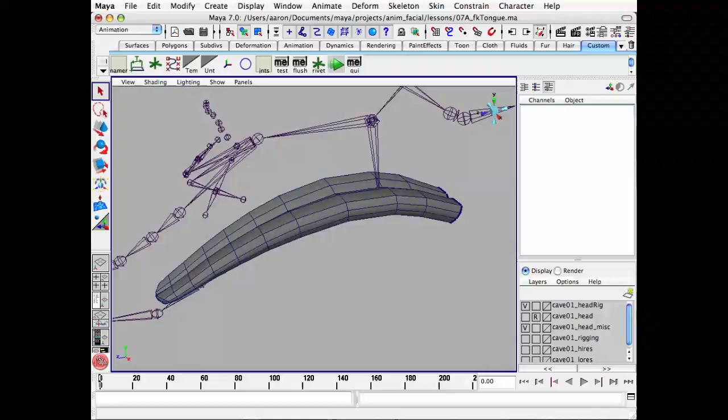So in this lesson, we're going to build a fairly simple forward kinematic tongue for this character. But although it's straightforward and fully FK, you'll see that we can add quite a bit of control to this tongue rig just using simple joints in an FK structure.

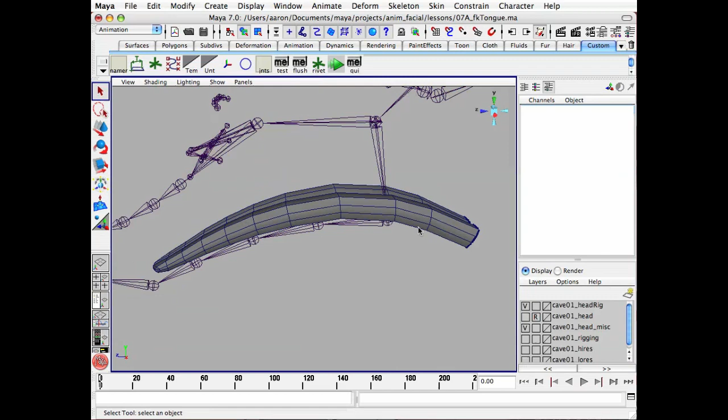So what we're going to do is we're going to start by drawing a series of joints down the length and then joints out to the side. So let's switch to a side view here. Just switch to select the skeleton joint tool, and starting at the base toward the center, I'll draw the joint nodes, basically drawing a joint on each of the edge loops.

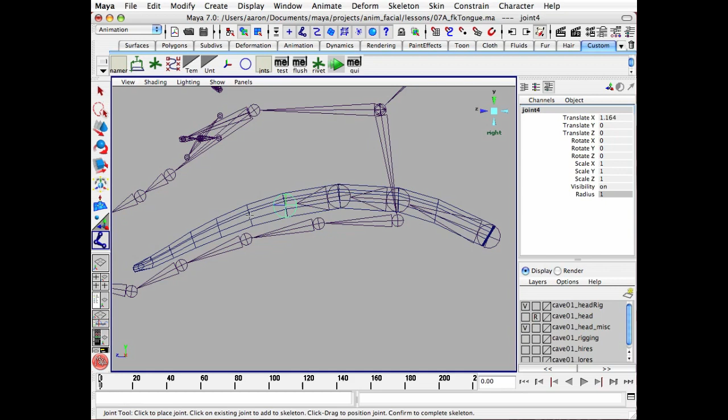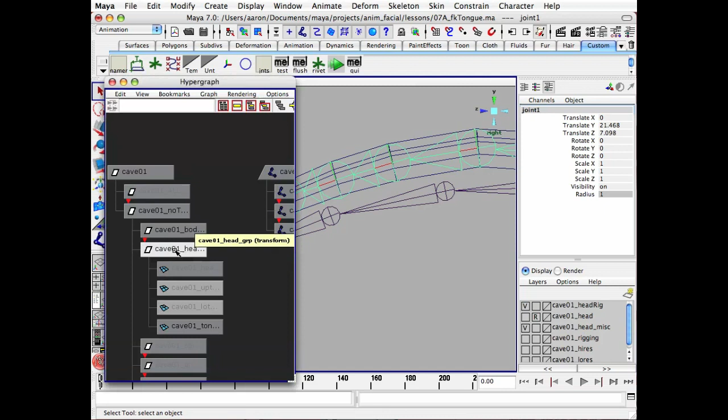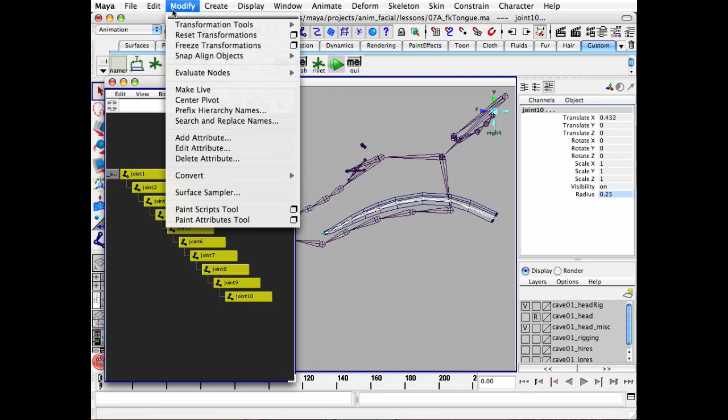As usual, you could use a spline as a visual guide for this. Okay, the one at the end. Open up our hypergraph here. So here are all of our joints. Let me select them and change their radius, make them a little smaller. Okay. So now with these selected, I'm going to just quickly rename them. Okay. Search for joint and rename.

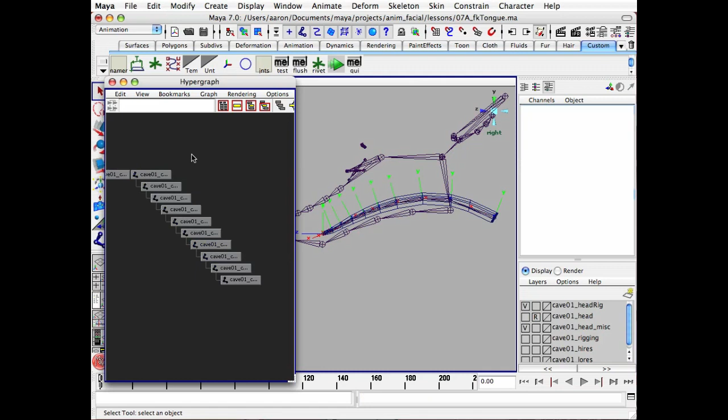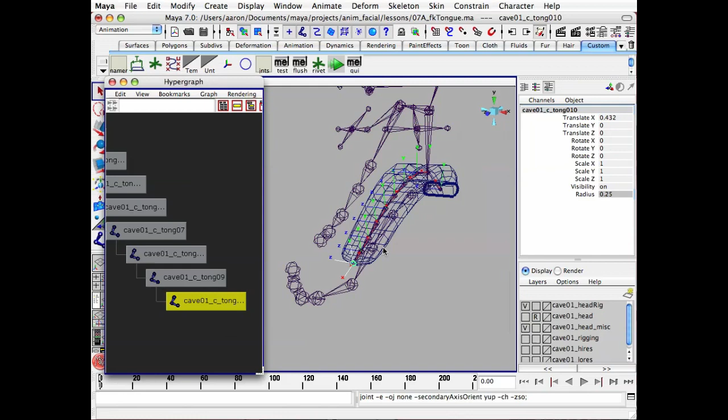Okay, now I'm going to display all their local rotation axes. Okay, first thing I'm going to do is reorient this last joint so that it matches the orientation of its parent. Then I'm going to rotate each of them 90 degrees so that the y-axis is pointing out to the side. So with the last joint selected, I'm going to select Skeleton, Orient Joint Tool, make sure that it's set to none, which is what we're using throughout these demos, tutorials. Okay, so now it's matching the orientation of its parent.

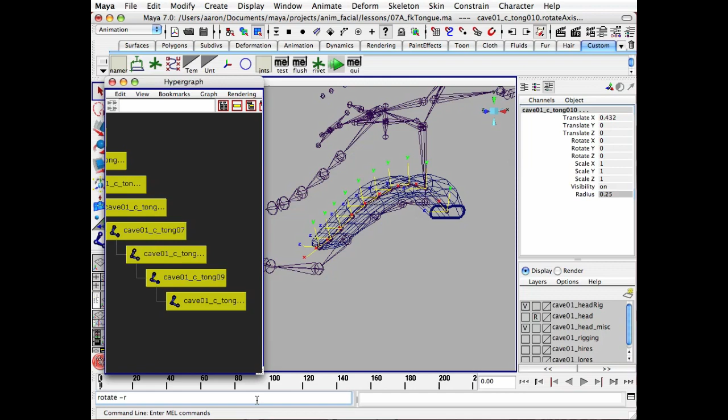Now I'm going to switch to component mode and click on the question mark icon, which activates the local rotation axis selection. I'm just going to select each of these local rotation axes and rotate them 90 degrees by typing rotate -r for relative 90, 0, 0. It's rotating 90 degrees on X. Okay, switch back to object mode. I can hide these local rotation axes.

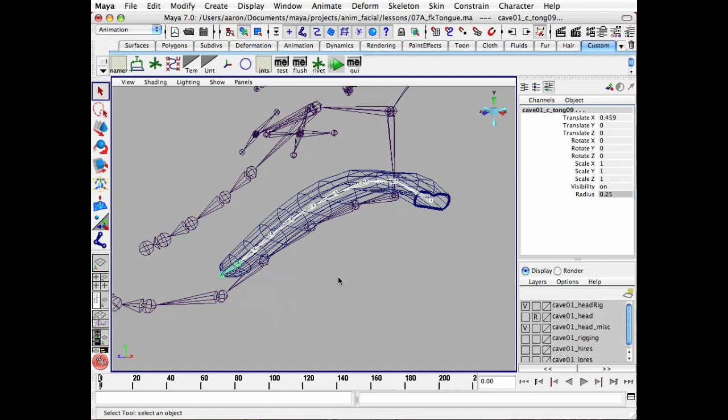So at this point, we have a basic FK tongue rig. Now we can do all the curling on all the axes. We're going to add a little more control here. I'm going to add joints which will emanate out to the side of the tongue. And that way that will give us control over folding this tongue upwards, what we call the tongue taco. Once again, that's pretty straightforward.

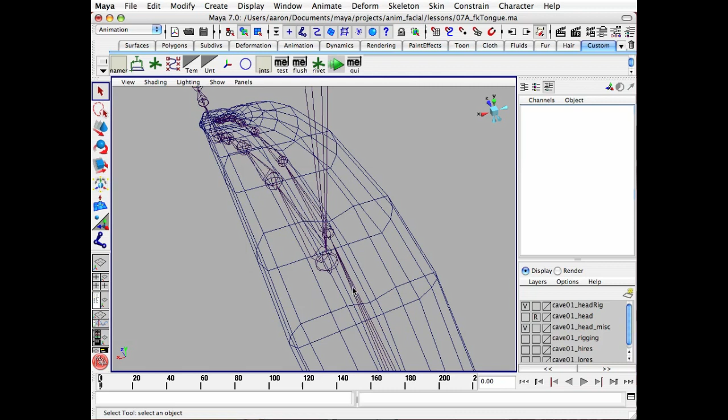I'm going to switch to a top view here. Hide the standard rig. Okay. So once again, I'm going to activate the joint tool. And holding down V, which activates the point snap, I'm going to snap onto the first joint. And then holding down Shift, just drag it out to the side so that it's creating a straight line.

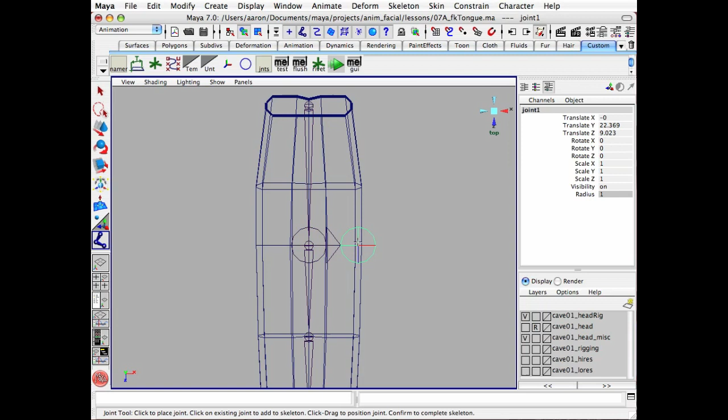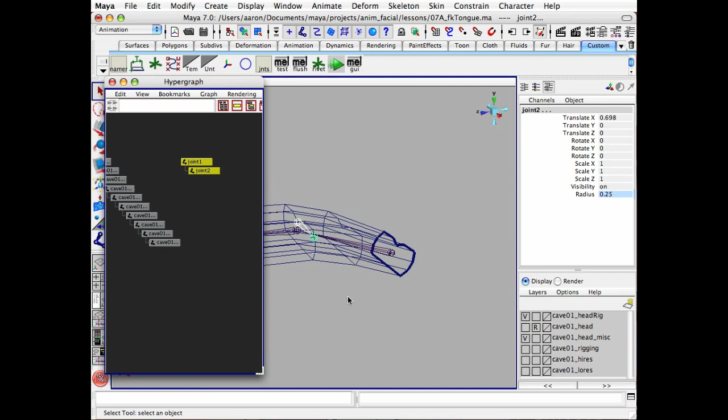Let me change my joint tool here so that I get a smaller radius. Okay. Okay, so now with this selected, just change this radius. Snap that down there. Quickly rename this. Modify, Search and Replace Names. We're going to call this L tong.

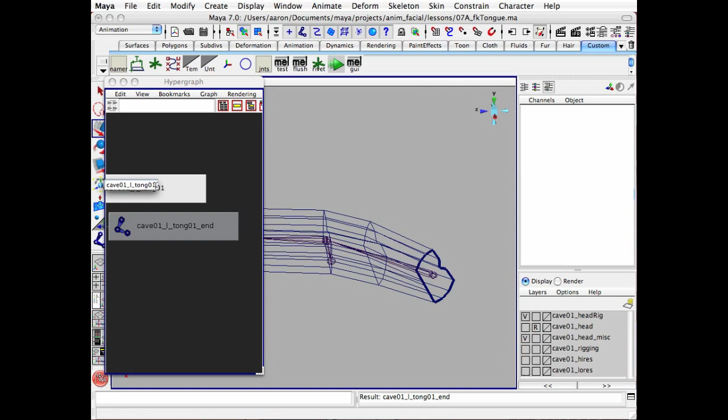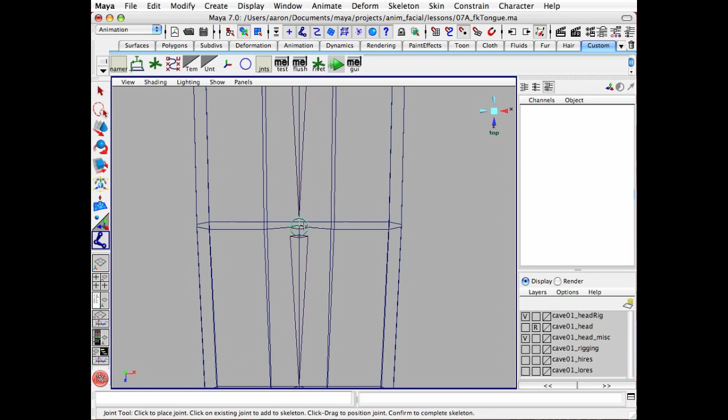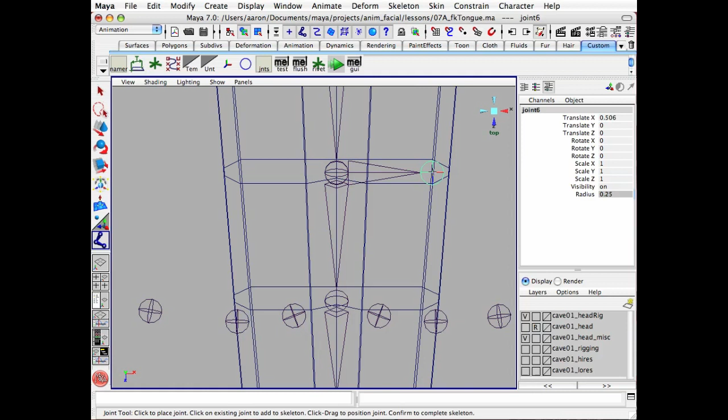And then repeat that all the way down the length of this tongue. Activating the joint tool, holding down V, snap the first one, and then Shift to just drag it out to the side. Okay, and one more.

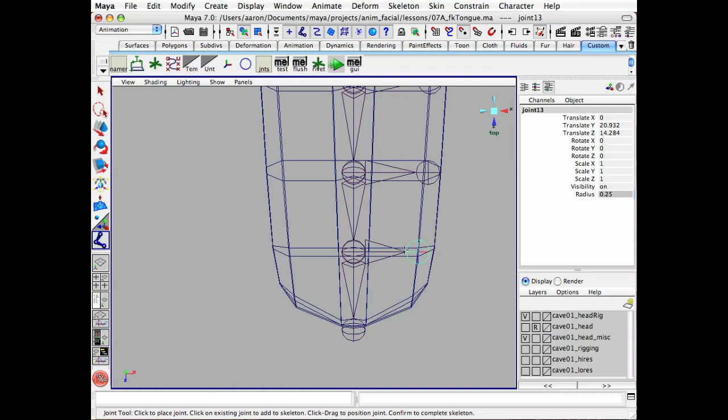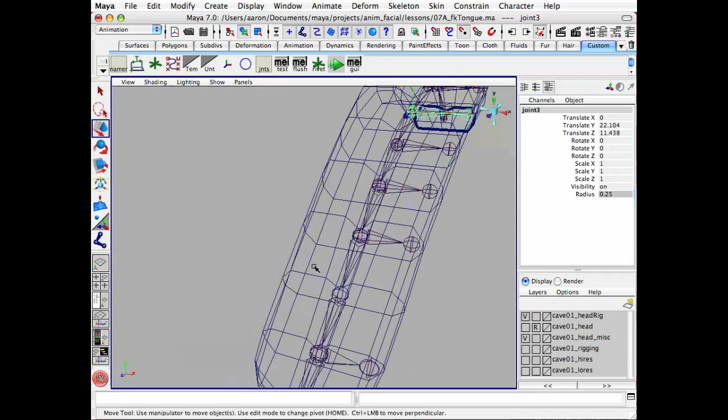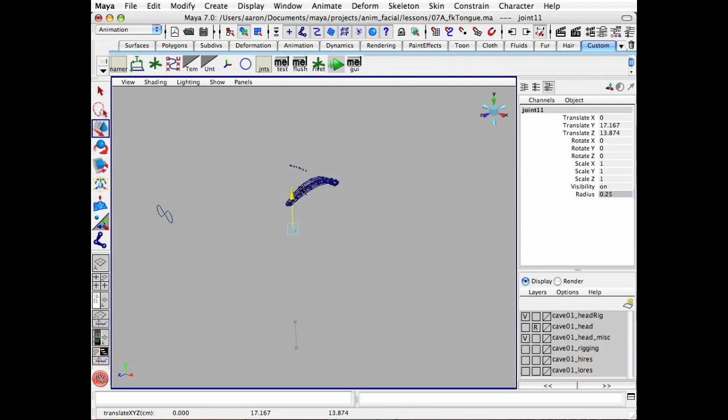Okay, so let's switch to a perspective view. We'll probably have to go in and point snap some of these joint nodes so that they reside directly on top of that center joint. Oh, we missed one here. Did we? Let's see here. Yep. Let's move this one up. Point snap it into place. Okay, there we go.

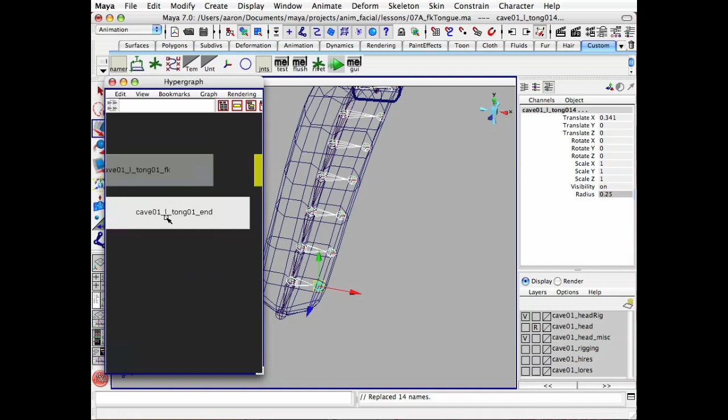So I'm going to quickly rename each of these. Going back to Modify, Search and Replace Names. Just quickly rename them. This will be tongue 2 FK. And so on. And the reason naming is important in this case is we're going to mirror these over to the opposite side, so having the underscore L underscore designation will help us mirror it from the left side to the right.

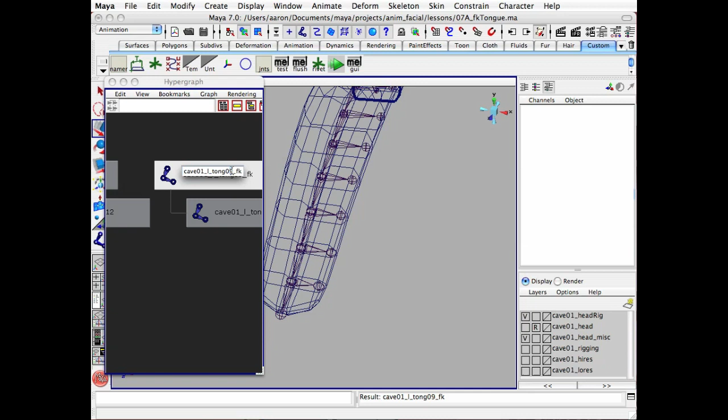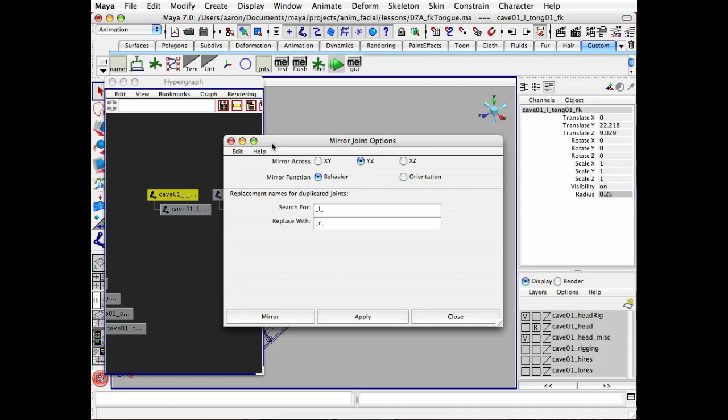Okay, so now with that done, go in and mirror each of these. So select each joint, the root of each of the left tongue joints, and then select Skeleton, Mirror Joint tool, open the option box. We're going to make sure that we're searching for _L_ and replacing it with _R_. We're going to mirror the behavior and then mirror across the YZ axis, which splits down the center of the character.

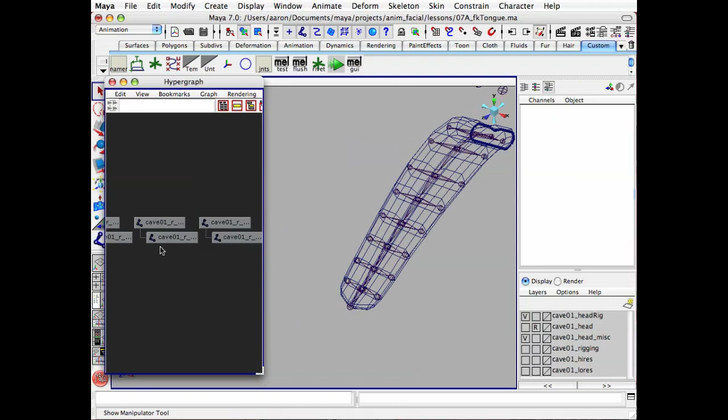Okay, so using the G key, repeat that for all the subsequent joints. Okay, so now we have our left and right joints. Now what I'm going to do is I'm going to simply parent these joints, the left and right joint, to the nearest joint node here. Let's hide the polygons for a second.

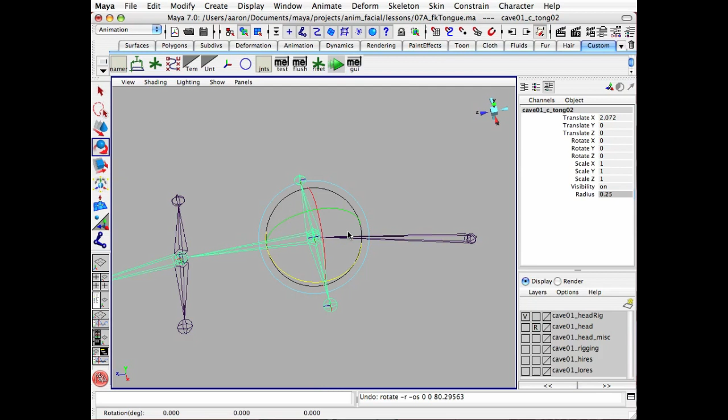So now when I rotate this, you can see that when we reach a 90-degree angle, the left and right joints fold in on themselves, and that would be pretty bad for the geometry here. What we're going to do is we're going to create what I call an averaging joint. Let's unparent this.

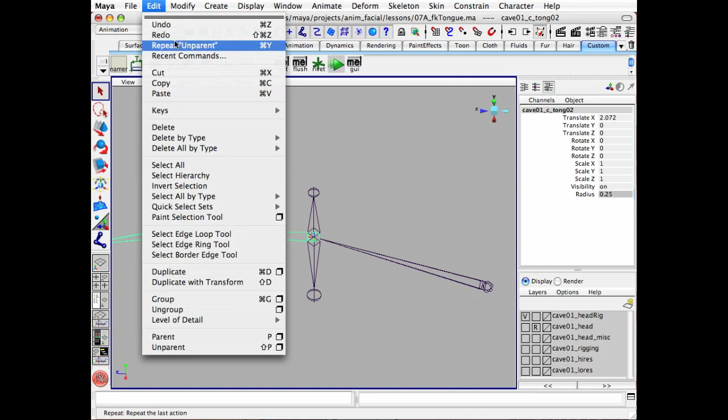What we're going to do is we're going to duplicate the center tongue joint, select it, Edit, Duplicate. Okay, make sure we have default settings here. So delete all the joints underneath this duplicate and call it C tongue 02 AVG for average.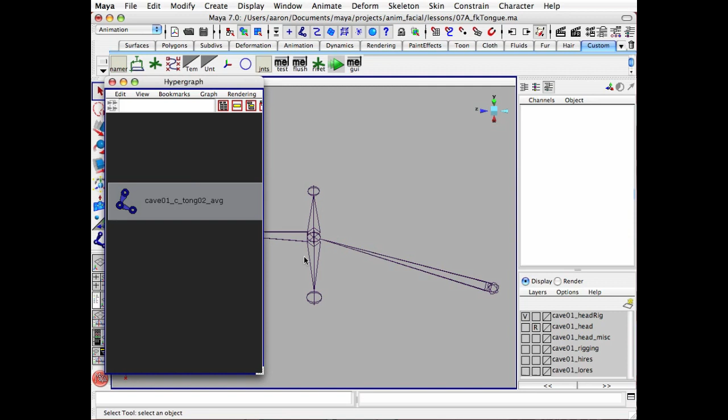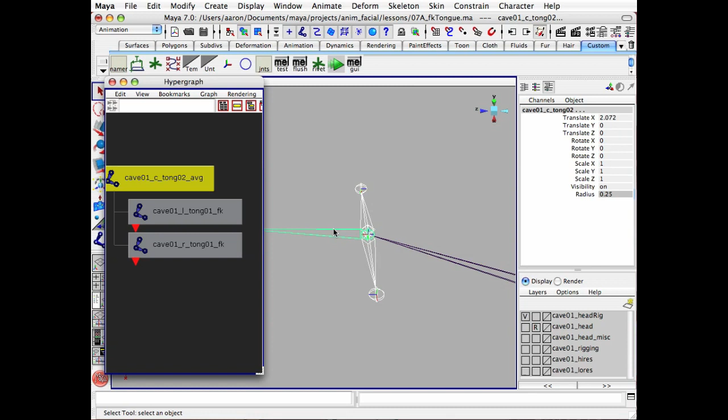I'm going to parent the left and right tongue joints to the new parent, the averaging joint. And then parent this averaging joint to its parent, which was the original from which it was duplicated. So if we look at the hierarchy here, we have the original tongue joint. We have a duplicate of that joint, so it has the same local rotation axes and position. We'll call that tongue average. And then the left and right joints are children of the tongue average joint.

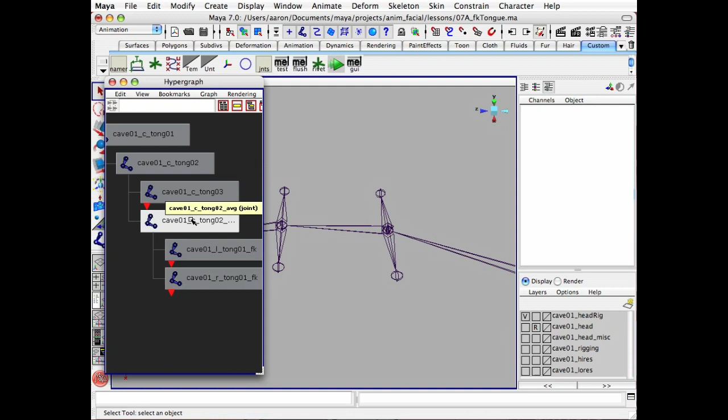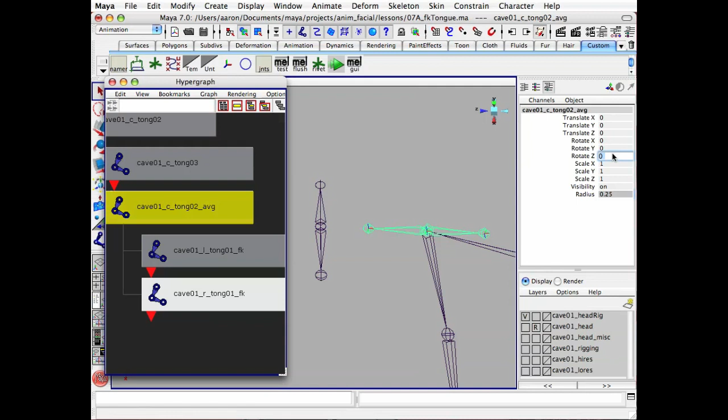What we're going to do is, using a multiply divide utility node, we're going to negate half of the rotations on all the axes of the tongue joint and apply that negative 0.5 rotation to the tongue average joint. So for instance, this rotates 90 degrees. We'll negate 50% of that. So in essence, this will be negative 45. So we'll average those rotations and help dampen the effect of this 90-degree rotation here. Help significantly with the deformations.

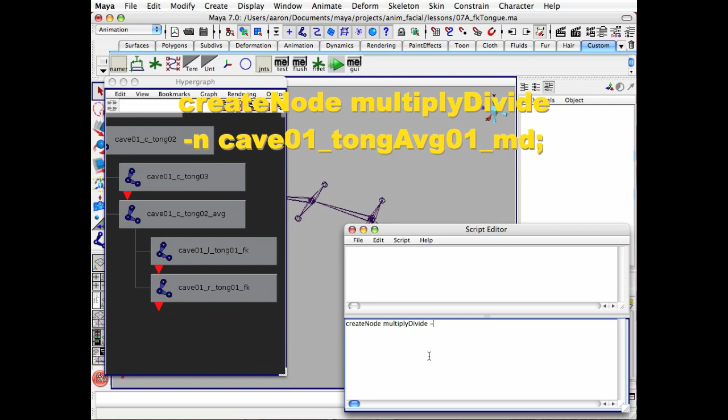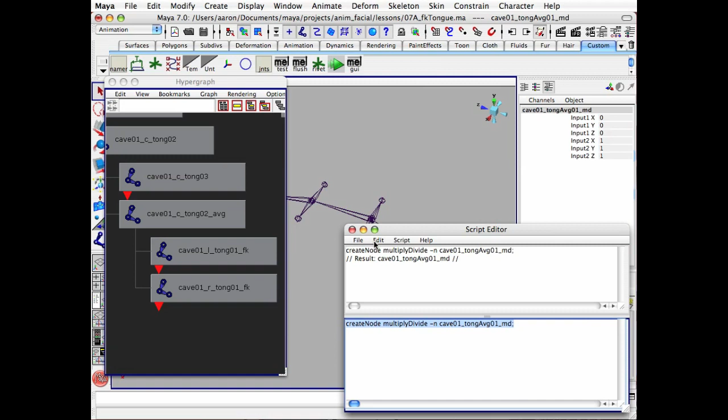Okay, so to do that, let's open up our hypergraph, our script editor, clear it out. We're going to first create a multiply divide node. So in the script editor, createNode multiplyDivide -n so that we can give it a name. We're going to call this cave01 tongAvg01, so tongue average 01 MD, multiply divide node. Select that, hit enter. So here's our multiply divide node.

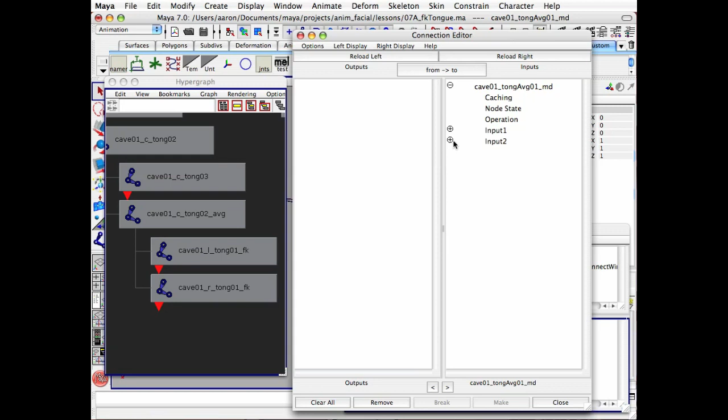With it selected, let's open the attribute editor. Make sure it's set on multiply, which is the default. And now let's open the connection editor. Window, General Editors, Connection Editor, and load our multiply divide node into the inputs. Okay, expand these windows here.

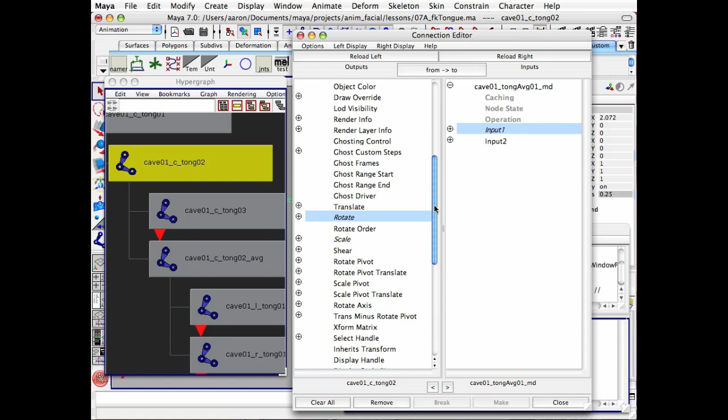What we're going to do is we're going to connect the rotate channels of the original tongue 2 joint. We're going to connect all of the rotation channels into the input 1 channels of the multiply divide node. So the rotates are connected into the input 1 of the multiply divide node.

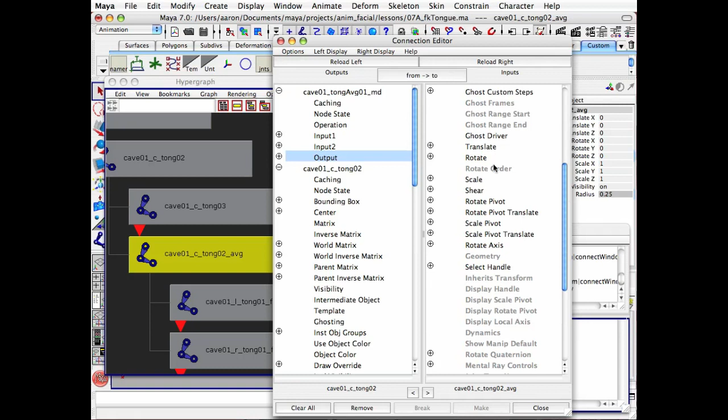I'm going to select the multiply divide node, load that into the outputs of the connection editor, select the tongue 2 average joint, load that into the inputs, and then connect the output of the multiply divide node into the rotate of the tongue 2 average joint.

I'm going to go back and copy and paste these results here. Reason being that if we were to duplicate this process for all the other left and right joints, it'll be fairly easy to do by just changing the numbering of these connection statements. Let's clear out the history of the script editor.

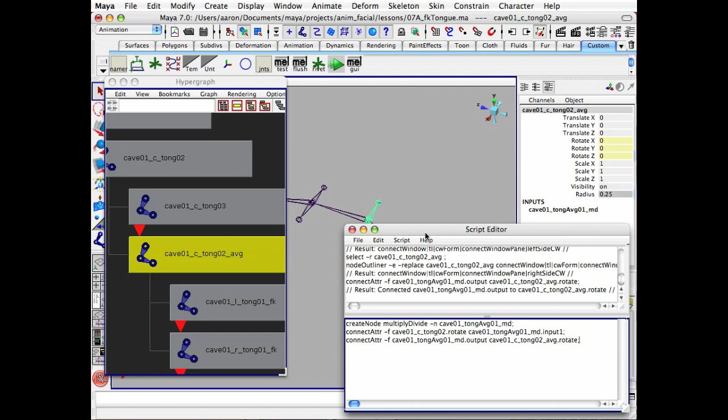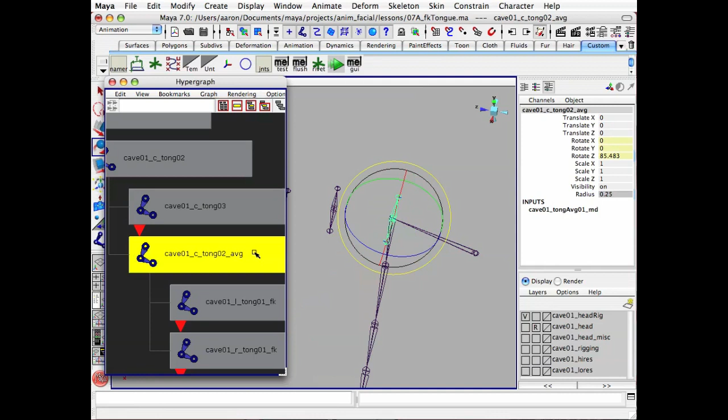So now with the multiply divide node selected, well, first let's rotate this, the original tongue 2 joint. You can see we're actually getting double the rotations on the averaging joint. Let's go to 90 degrees here. The reason being is we're connecting the rotations of the tongue 2 joint into the rotations of the tongue average joint through the multiply divide node.

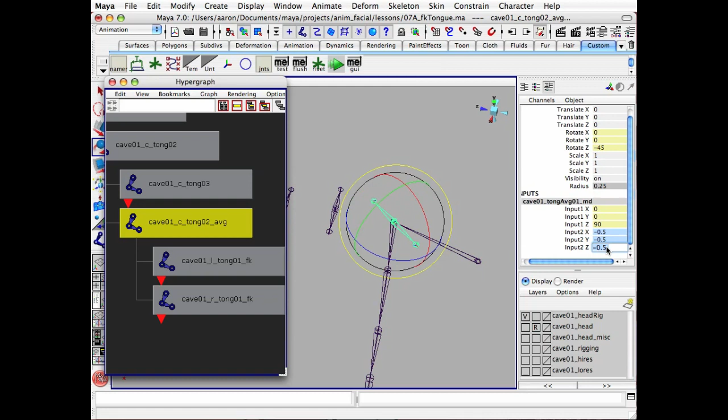So we have a 90-degree rotation in Z. We're feeding that 90-degree rotation again into this tongue average joint, but it's also inheriting the 90-degree rotation from its parent. So it's actually getting 180 degrees rotation. So what we need to do with the multiply divide node is set all of the input 2 channels to negative 0.5. And that's how we will average the rotations out. Let's select those setAttr statements in the script editor and copy and paste those.

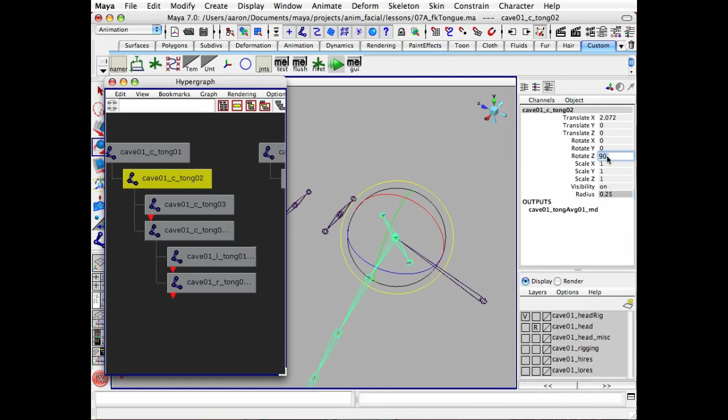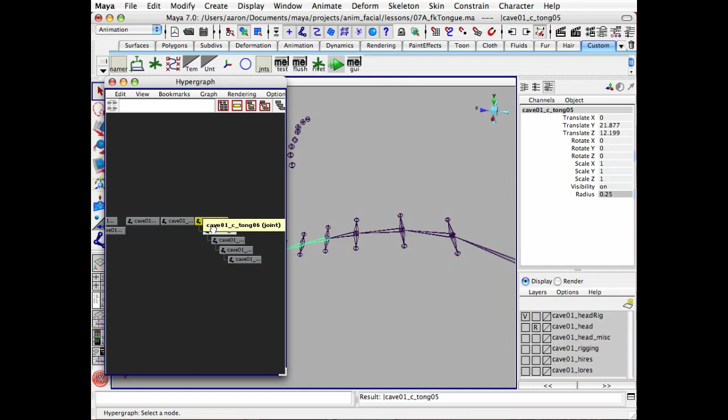Okay. So now to duplicate this process, just going to select the tongue 3 joint, Control D to duplicate. Unparent each of these, and these are going to become our averaging joints all the way down this tongue. So I'll just rename a few of them.

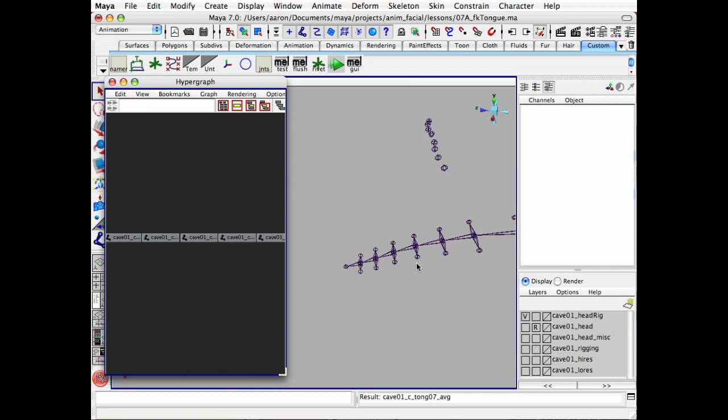Of course, I ended up renaming all of them. Okay, so we have our tongue average joints, and I'm going to parent the corresponding left and right joints to the proper average joint. Just selecting the left and right joint, shift selecting the appropriate tongue average joint, hitting P for parent.

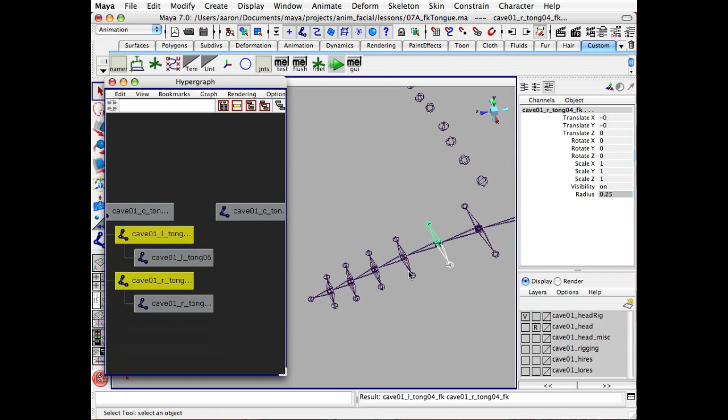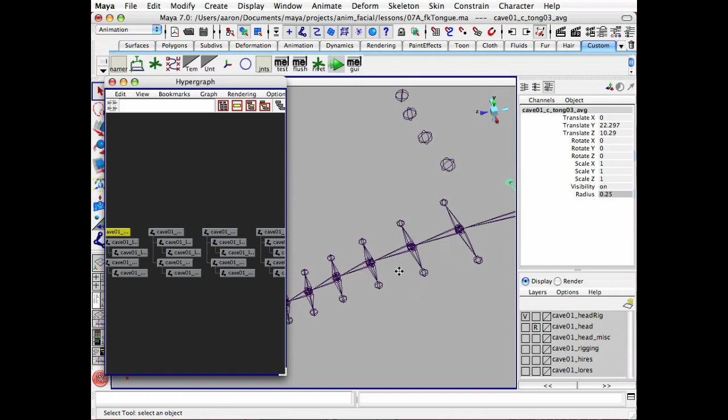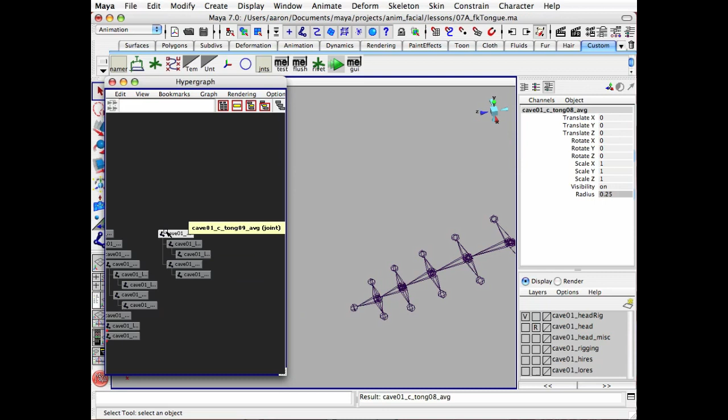Okay, now I'm going to parent the tongue average joints to the appropriate parent. Although I'm doing this all manually, something like this you can see is quite repetitive and could be fairly easily scripted, especially since you likely have matching naming. Like for instance, if you match the numbering of your tongue average joint, tongue 9 average, with the joint that it's the duplicate and parent of, scripting this should be fairly simple.

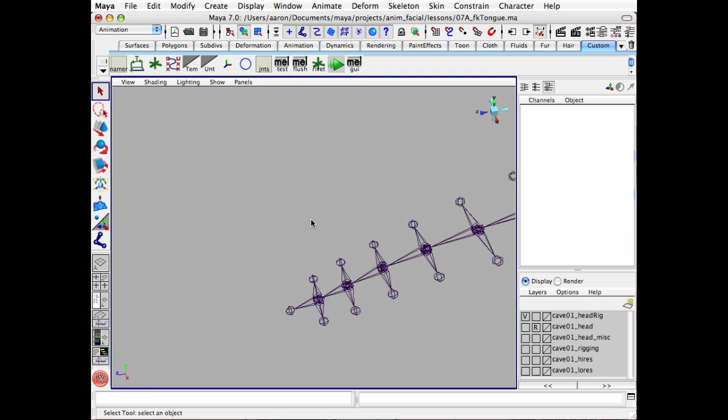So next what we're going to do is simply change the numbering in the input section of the script editor so that we will apply this averaging down the length of the tongue. So here, rather than tongue average 0, 1 multiply divide, we'll change that to 2. So all instances of that tongue average 0, 1 will change to 0, 2. Then we'll increment the joint. So this is tongue 0, 3.

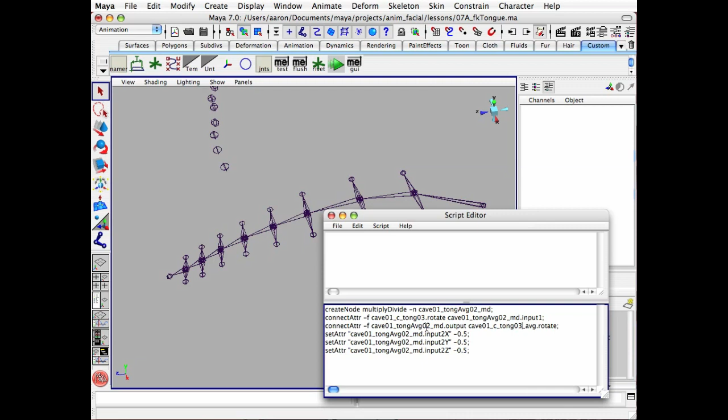Okay, select this, hit enter. So now we should have 2 averaging joints. Okay, there they go right there. Looking fine. We'll just quickly go all the way down the length until we finished with 9. Once again, you can see how something like this can and should be MEL scripted, since it's highly repetitive and through naming and numbering, you should be able to automate something like this fairly easily.

But you'll see once this is done, although this is a fairly simple and straightforward tongue rig, it's actually quite capable. It can do just about anything you'll need to do with a tongue. You'll be able to rotate it on all the axes. You'll be able to scale it. I wouldn't recommend translating it. You'll throw off your local rotation axes. And with the side joints, you'll be able to fold the tongue up or down. So quite a bit of flexibility.

Okay, thanks for bearing with me as I change these numbers out. Just a couple more to go here.

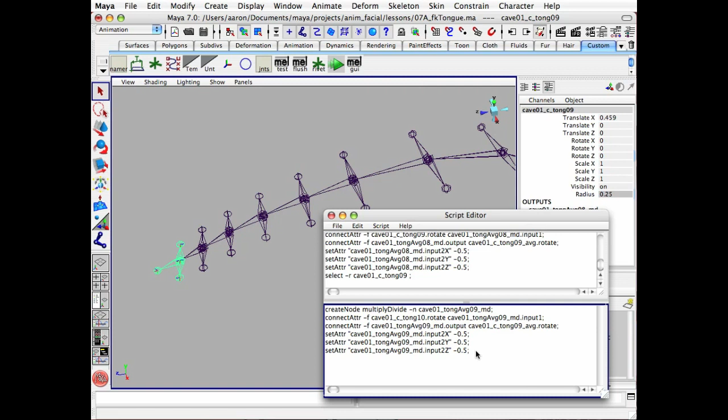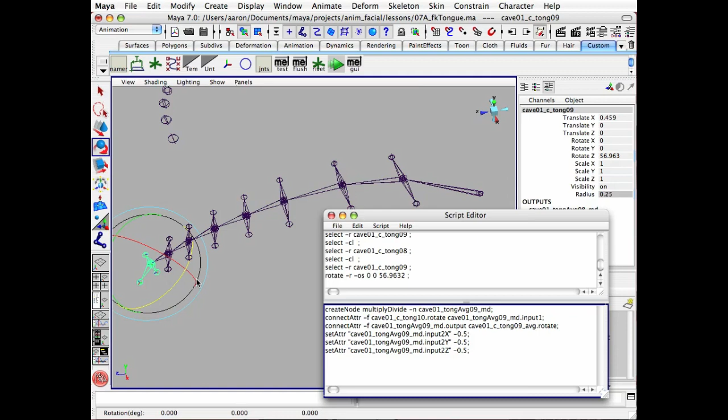Yeah, this is the type of tongue rig I personally like to use, if this FK style tongue is appropriate, which often it is. But once again, it's very simple, I think, and surprisingly flexible. You'll see that once you start building and posing this, you can get quite a bit out of it. Okay, one more. Okay, actually completed this.

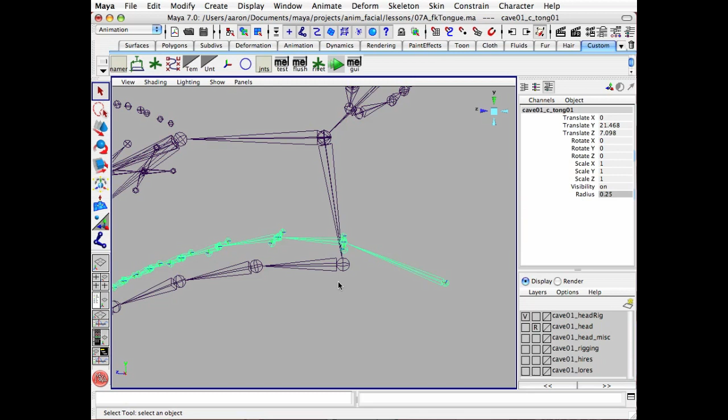Okay, so show our geometry. So now what I'm going to do is parent this tongue to the jaw joint, the second jaw joint. So select the child, shift select the parent, hit P. So now this is in the hierarchy. It's going to get all the head rotations. I'll do a simple bind.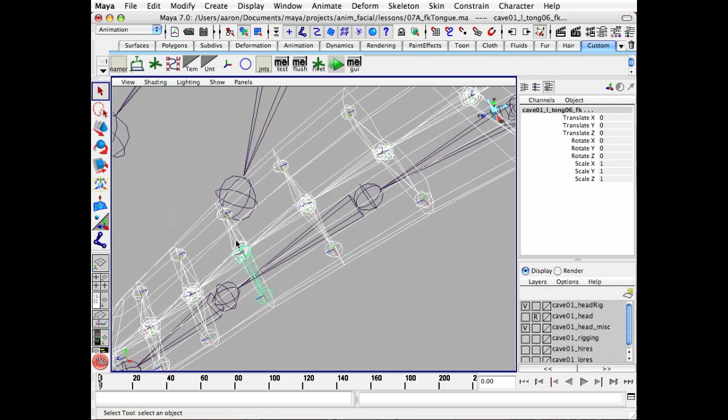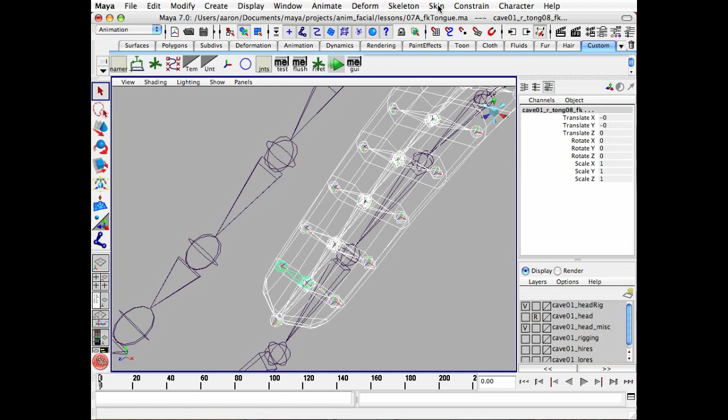Even with the default binding, you'll see that we'll get fairly close to an end result. The geometry is fairly simple, so you'll tend not to need much work on this in terms of the deformations. So with the joints and the geometry selected, Skin, Smooth Bind. Once again, our defaults for this tutorial, selected joints, closest distance. Okay, so there we have it. Once again, these are defaults.

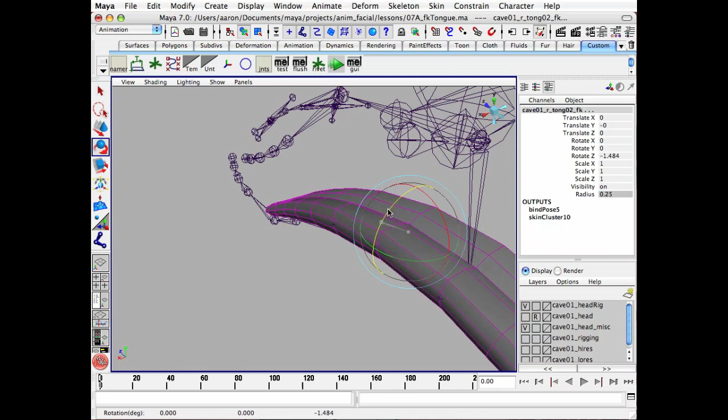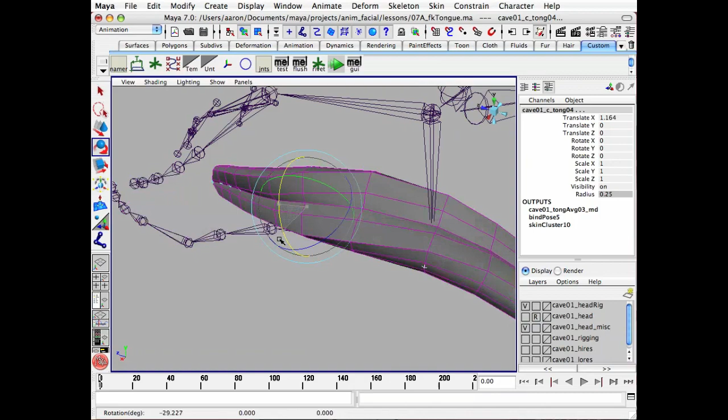So there's our tongue taco. We can fold it up. And curling on all the axes. And because we have those averaging joints, we're not getting the folding in on itself. Okay. Once again, pretty simple and straightforward tongue rig.

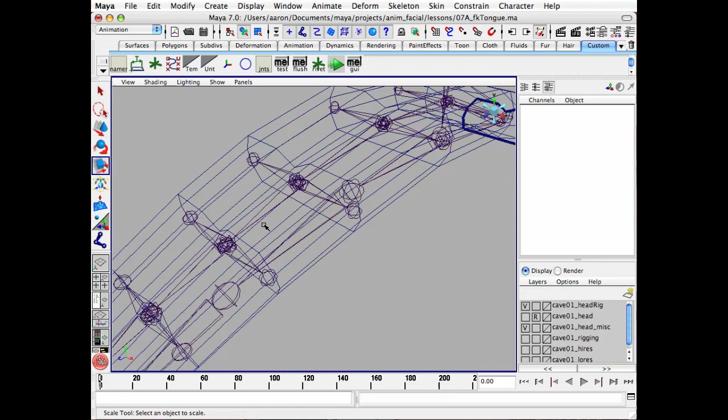Fully FK, but surprisingly flexible, particularly when you add in the side joints, which have not only rotation but scaling control, and scaling control on all of the tongue joints lengthwise. But they also have the averaging on the rotations, so that you can get fairly extreme sideways rotations, actually rotations on all the axes, and still maintain a sense of volume with the tongue here.

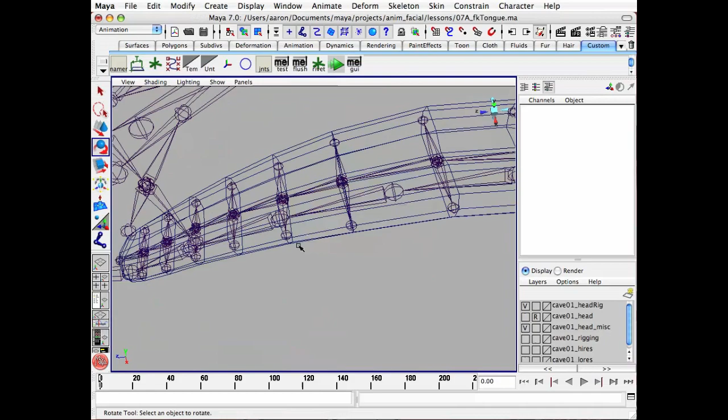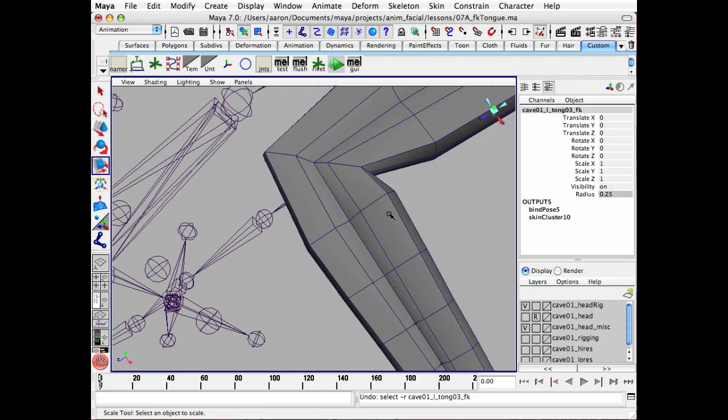Like for instance, if we were to select this and fold it in on itself, and grab one of these side joints and scale it, we can still do a lot to help smooth out that kink and preserve volume. Okay, so there's the FK tongue joint rig.